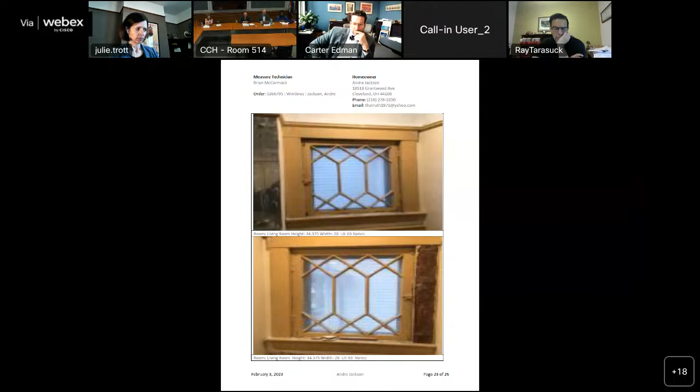So although the current proposal removes the front of the house from the scope, staff would also like to call attention to the decorative casement windows in the living room and the leaded glass sash that appears to be in the dining room. While these windows are on the side of the house, they're significant and losing them would be unfortunate. So the commission typically allows for vinyl replacements on the sides and rear of a home, but in this case, staff feels that the decorative windows on the side of the house are worthy of preserving.

So essentially, we'd be supportive of replacing the simple 1/1 windows as long as the configuration matches the existing, but we'd like to see the preservation of the leaded glass and decorative sash on the sides, which I believe is the image there now. I don't know, it's difficult to tell what room that is, if that's the front of the house or the side. It sounds like that's the dining room, which faces the side.

Yeah, I do have a question, if I could ask. How do we preserve the leaded glass by replacing the window? You can't preserve it and put a new window there. That's correct. I guess staff's position is that the customer needs to just keep the leaded glass old window because it has leaded glass in it and not get a new window, is what I'm hearing. That's the staff recommendation, that anywhere there's decorative sash or leaded glass, those windows not be replaced, but preserved in place.

Okay, thank you for that recommendation. We're going to move on to commission members' questions and comments. Who'd like to start us off?

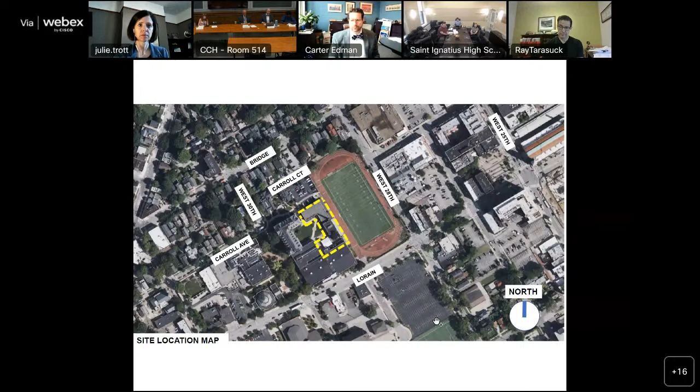Just to reorient everybody to the existing campus, I'll work clockwise from Carroll Gym. So we are proposing removing and demolishing Carroll Gym and the power plant. As we keep going around the clock, Murphy Gym and Sullivan Gym will not be touched.

Library will be fully... excuse me.

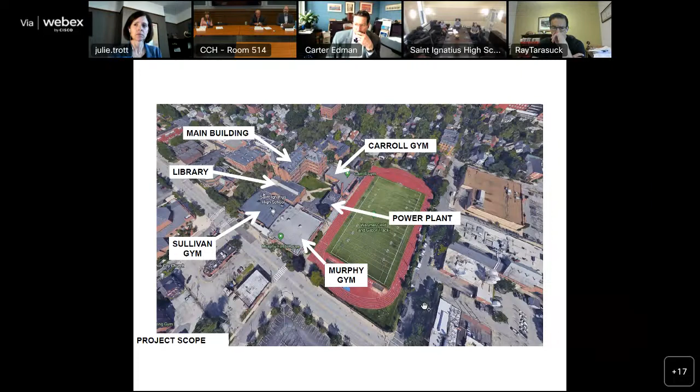Okay, again, Carroll Gym proposed to be demolished, power plant proposed to be demolished. Murphy and Sullivan Gym will remain as is. The library building will be heavily renovated, and the addition will be connecting to the library and to the main building, with some minimal renovations within the main building.

Again, the two buildings being demolished, their footprints. The addition is being placed where those former buildings, the future to be demolished buildings, are, and you can see how it connects to the library.

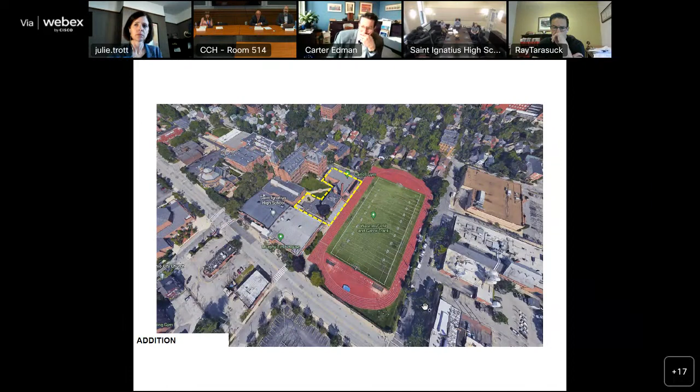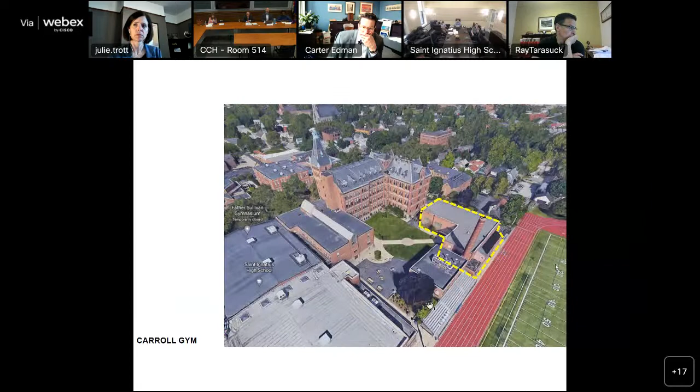Just some closer up images. This is Carroll Gym, I believe built in the 1920s.

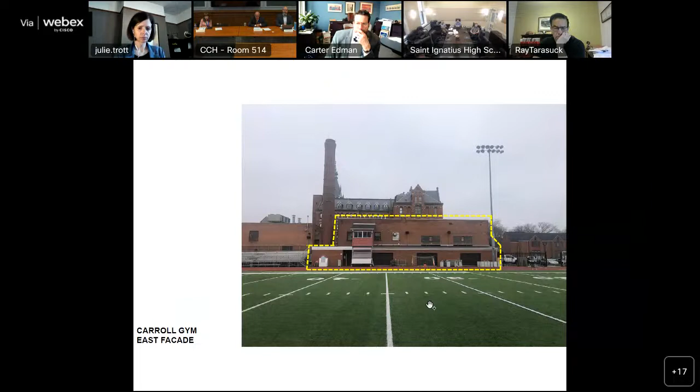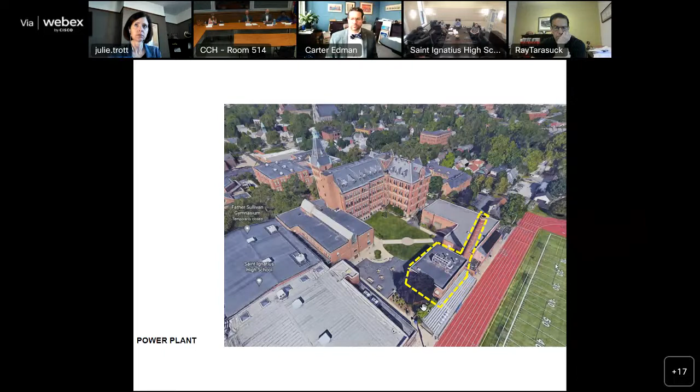Again, the second building to be demolished is a power plant building and the smokestack. This was built in the 1940s.

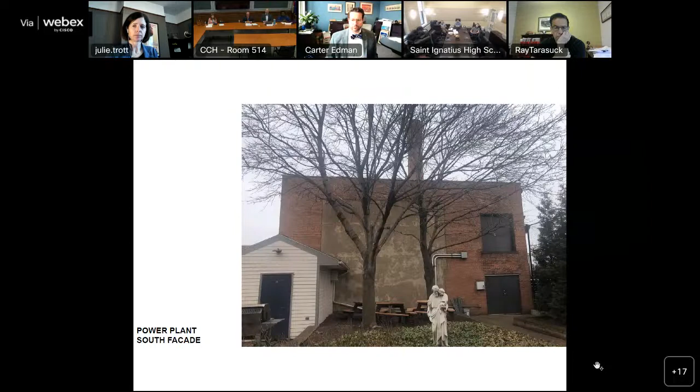Then the venerable 1890s main building. Again, we're touching it and lightly renovating it for some infrastructural things.

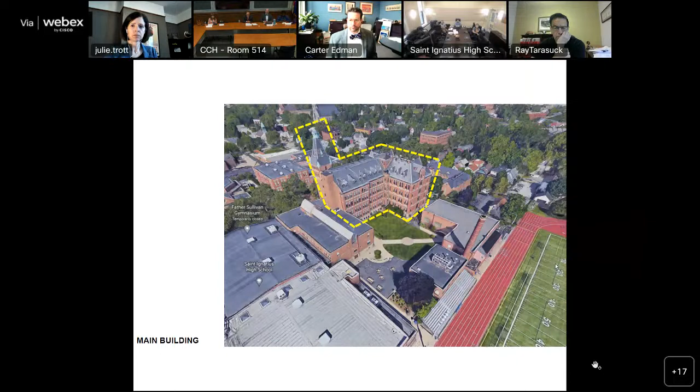And then you can see the interior facades, so the east facades of the main building.

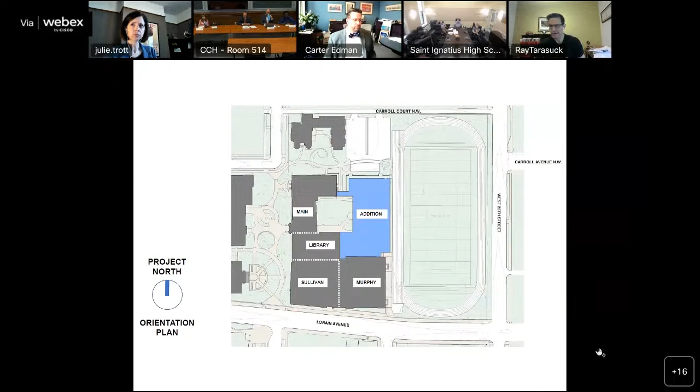So the blue box shows the approximate footprint of the addition. It's always a little bit shifting, but that's in essence the size of the addition.

Part of the scope is to provide a pleasant outdoor campus space between the addition and the main building, so it'll be a combination of hardscape and softscape.

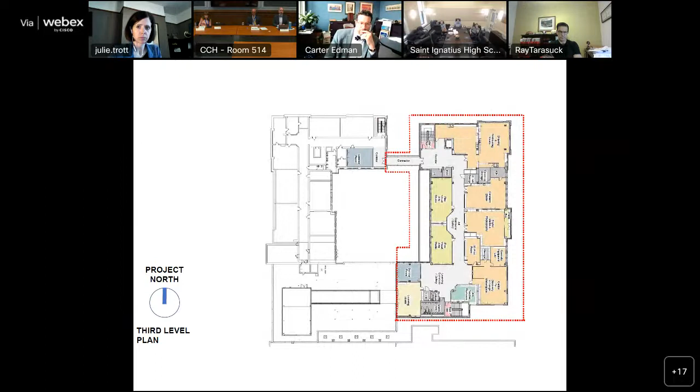The third floor is primarily dedicated to the arts, the fine arts. So we have a series of art studios and making spaces in the orange tone, and then some other flexible classrooms.

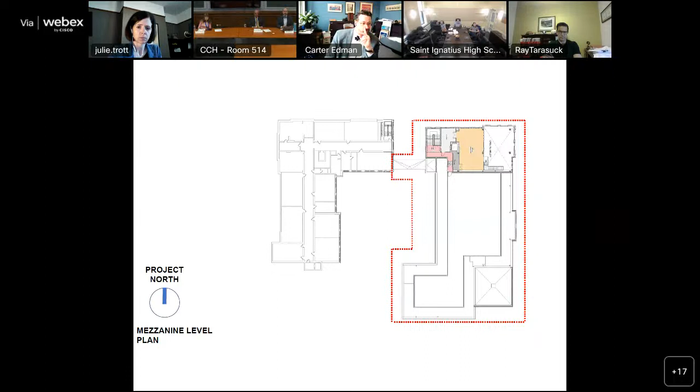Then we have an arts mezzanine to the north side. This is designed for advanced art students, kind of their own studio space that overlooks the main studio space.

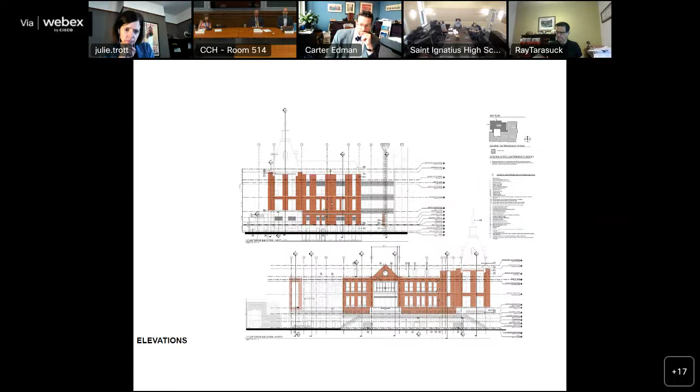I threw the elevations in there to get a sense of the massing. I think the renderings tell a better story.

The changes you saw from last time: the building became more red brick. In discussion with the school and taking in other discussions with the OCI group, we decided to make it more red brick. Across the facade we chose buff material, some cast stone products, at the bases of the AMDG mass, the gabled mass, and the tower mass. The tower has become a much prouder structure than before; previously it was a little stunted, so we let it be more vertical oriented this time.

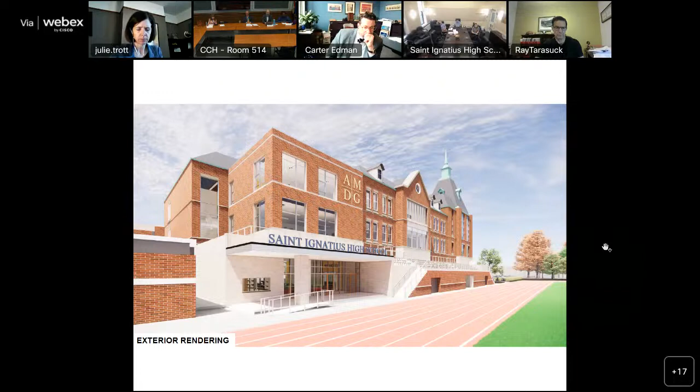This is the view from across Wasmer Field, looking west. You can see more of a red brick composition with the grounding of the building in buff material, which references the buff base of the main building.

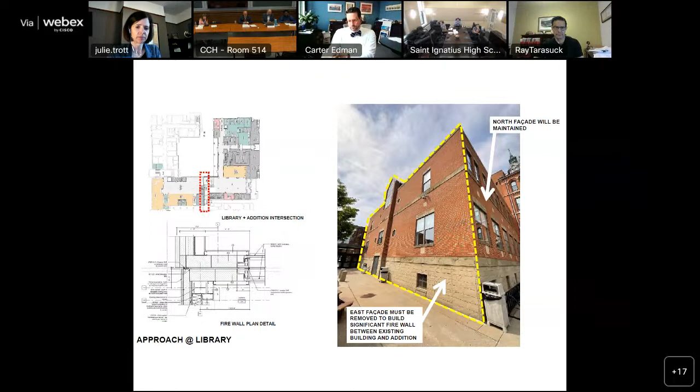We were asked to further discuss how we're attaching to the buildings. For the library, everything within the yellow dashed lines needs to be removed. From a code perspective, we had to make the addition a separate building due to area requirements, so we're building two-hour firewalls at this location to make the addition code compliant. The east facade will be torn off, and the north facade will be maintained.

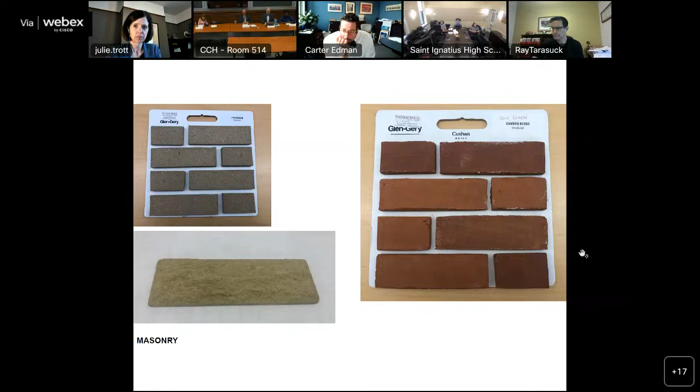Materials are selected to emulate and reference the main building - so I have red brick and buff material.

Miscellaneous metals, downspouts, and gutters will be brown or bronze type. That'll also be the color for the windows, storefronts, and curtain walls.

The accoutrements around the tower will be a green metal to mimic patinaed copper. We wish we could afford copper, but that's not in the cards at this moment.

For the mansard roofs, it'll be a dimensional shingle. Also, one thing I forgot to mention on the tower - we do intend to do a polychromatic banding around the tower element in reference to the main tower at St. Ignatius.

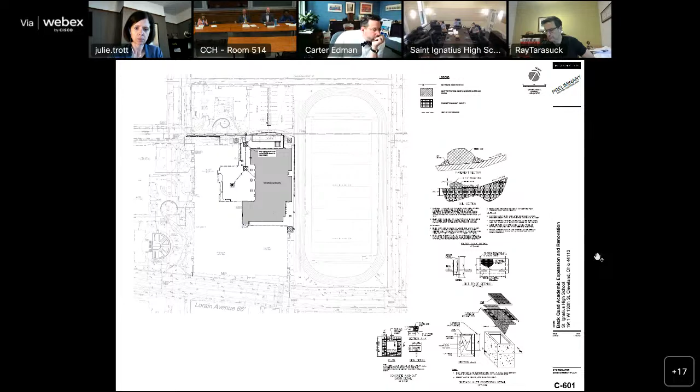This is the area of disturbance diagram, showing what is disturbed and what will be reset during the project. And that's it.

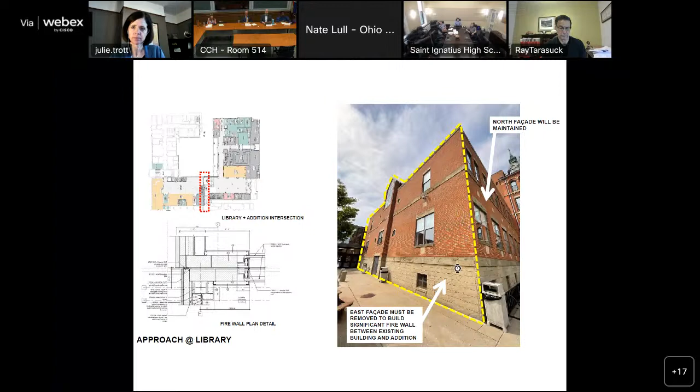Mr. Edman: Thank you Madam Chair. I like the changes, and I think the tripartite massing of those three major elements is really working well. I would echo the design review comments of at least studying the cast stone on that front at the base - not sure which is better, but worth studying - and also extending the lintels beyond the width of the windows, which would help that idea that it's a lintel, but also the overall texture of the facade. So those are both worth studying.

I had a question on the bridge. I understand the bridge is basically all glass, right? It's spandrel and then vision glass, is that correct? Correct. And what color is the spandrel glass? We have not selected that yet. Personally, I like spandrel glass that tries not to look like spandrel glass, but we can do that. We have not selected a color yet.

Okay, I think that's definitely an area of study. I think doing the bridge in glass is the right move here - the contrast is clear, this is a modern piece attaching to the historic building. I think you should consider not having the brick piers as the columns supporting the bridge, but something more in keeping with the architectural language of the bridge itself - maybe round steel columns, something like that. Again, it's part of that new piece that's inserted, so it should be of that language. My other question is, is the bridge cantilevered to the existing building, or structurally attached? The piers are carrying the load and it cantilevers over to the main facade, so we're not resting the bridge on the main building. So it's really just an expansion joint between the two. Correct, okay.

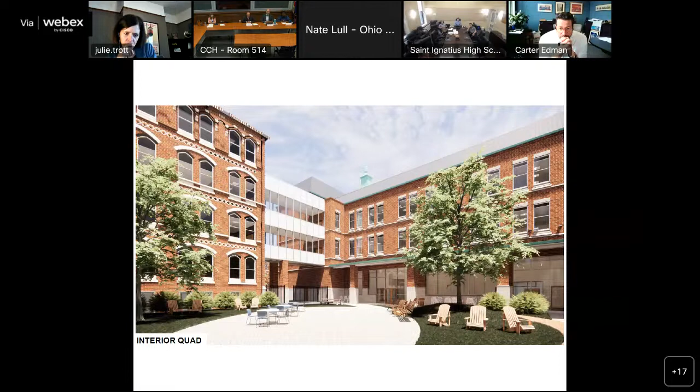Yeah, other than that, I think this is quite nice, but I certainly would ask you to consider something more modern looking for the columns supporting the bridge. If I could just respond - we did it in masonry because we were concerned, although it's shown right now as a beautiful July day with chairs, there will be vehicles that have to get in and out of here, or just wear and tear. So we were concerned that a steel or metal enclosure would get beat up more, that's why we leaned towards masonry. We'll consider it though. Yeah, or maybe a very clean concrete pier. Correct, okay, but yeah, thank you.

Thank you, Mr. Edman. Other questions and comments from the commission? I will insert mine now.

I support and appreciate the applicants listening to our feedback on some of the architectural elements previously, especially the tower. I like the new configuration - it shows reference to the obviously iconic tower, but is different enough that it's not trying to compete with it. I like the adjustments in the brick material, but also think it's worth studying the brick versus the cast stone base for the building, just to see how the massing will feel with that revision. Overall, the comment on the lintels I think is also a good one, so that since there is so much texture and depth to the existing buildings across the entire campus, we want to make sure this one has as much detail and depth as everything else. So, but I'm overall in support of the project.

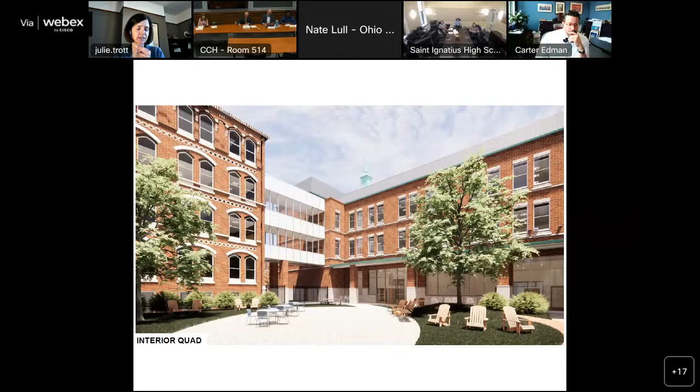Mr. Musson, please call roll. Ms. Anderson? Yes. Mr. Dryer? Yes. Mr. Edman? Yes. Councilmember Gray? Yes. Mr. Strickland? Yes. Mr. Tarasuck? Yes. Ms. Trott? Yes. Madam Chair, the motion to approve the demolition passes unanimously.

Thank you. We'll now move on to the new construction. Any further discussion on the new construction, or would someone like to make a motion?

Mr. Edman: I would move that the project be approved as presented with the considerations that the proposer investigate potential for cast stone at the base, expanding the size of the lintels, and potential other materials for the columns supporting the bridge. Okay, thank you.

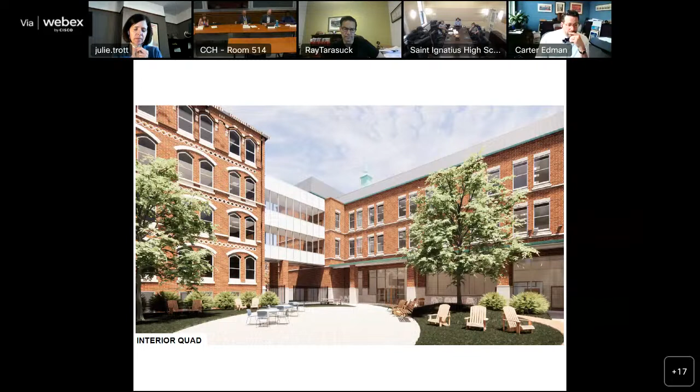Motion with conditions. Do we have a second? Mr. Tarasuck: I'll second the motion. Any further discussion?

Mr. Musson, please call roll and announce the results. Ms. Anderson? Yes. Mr. Dryer? Yes. Mr. Edman? Yes. Councilmember Gray? Yes. Mr. Strickland? Yes. Mr. Tarasuck? Yes. Ms. Trott? Yes. Madam Chair, the motion passes unanimously.

Excellent, I look forward to seeing your project move forward. What's the timing of the new construction? If all goes well, renovations will probably start in January of '24. With the addition, you'll start seeing steel going up probably summer of '24, with anticipated completion for fall semester '25.

Excellent. Well, good luck. Thank you. Thank you all. Thank you.

Mr. Edman, before I move on to the next applicant, I see your hand still up. Was that just a thank you? Just want to make sure I wasn't overlooking something.

Then we'll move on to our next applicant, 50 West, located at West 50th Street and Lorain Avenue, renovation and new construction.

Good morning everyone, this is Chad Curtis with My Place Group. Happy to present our 50 West project. It's located between 50th and 52nd on Lorain. It encumbers the front on Lorain on that block and then wraps around on the sides.

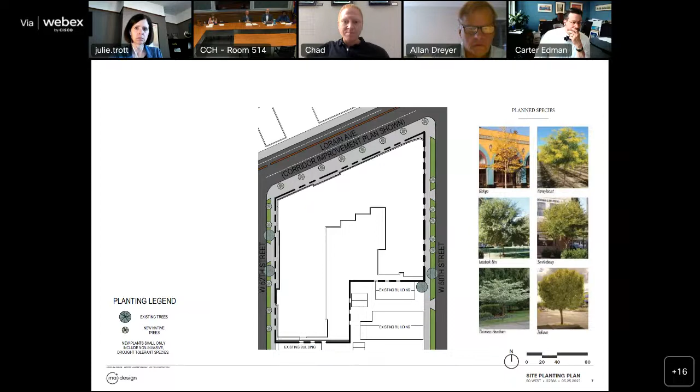Overall, there are about 62 parking spaces and 44 bike spaces on the ground floor.

Listening to feedback, we originally planned the exit of the garage to be off West 50th. We flipped that over to West 52nd.

One of the other things you'll see in the next slide is that the setback we've made at the garage entrance is pretty significant, so there shouldn't be any pedestrian interactions right away as soon as a car pulls out. They'll have plenty of time. We've widened the opening so that you have plenty of angles to see people pulling in and out and pedestrians walking by.

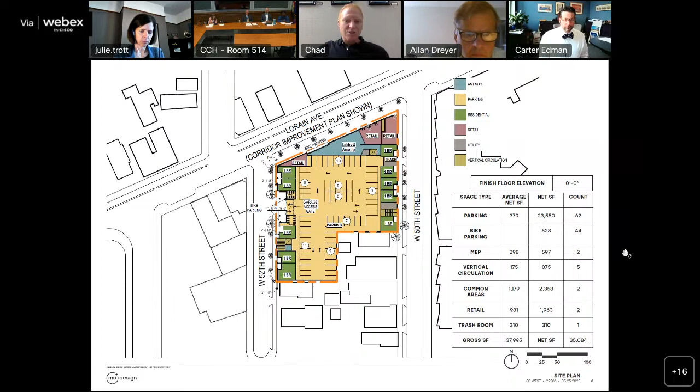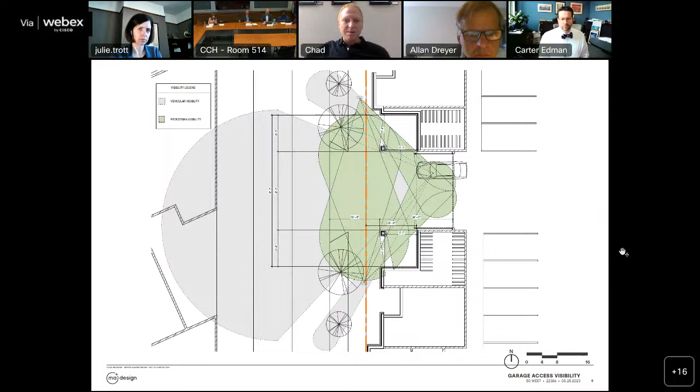It's a dead-end street, but there's still some other people on it. This is a good perspective of what I'm describing. We've got bike storage on both sides of the garage entrance, for easy access for people to come in and out with their bikes, going along with the Lorain bike corridor they're looking to put in when we merge that.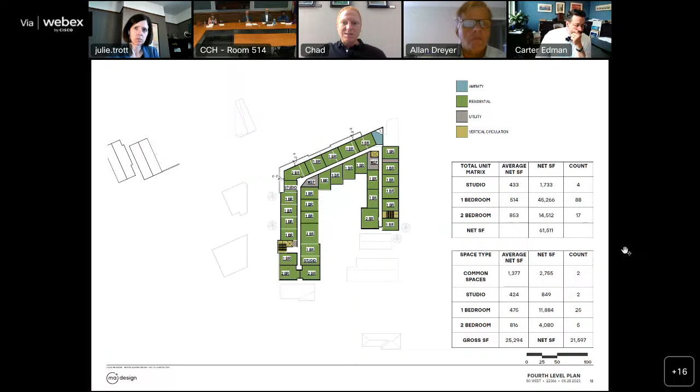On the existing buildings on the corner, our plan is to restore the storefronts that were there, doing our best to bring them to what we think they were prior, while generally keeping a similar facade along all the new storefronts and the old ones going down the lane, so it feels connected and contiguous - adding new flair without disrupting the rhythm too much.

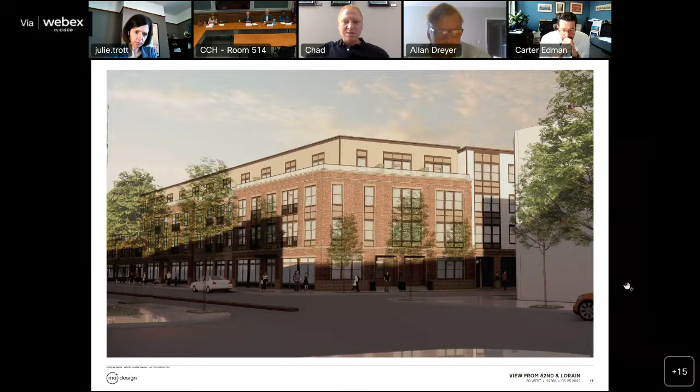Go to the next one. This is the view from 52nd.

Let's zoom in on this. I'm going to let the architects go in detail and answer any questions, then I'll jump in as needed on the different materials.

Hi, this is Yevgeniy with MA Design, the architects on the project. For the most part, for the existing portion of the building, we are going to try to maintain the materials that are there regarding the brick and lintels and everything. For the storefront, we're looking at Kawneer with a black finish, and for the windows, we're looking to have aluminum-clad wood windows for the renovation portion along the front there.

For the rest of the building, the color changes to a more tan color, and for the most part, for the lower portion of the building, we have two types of brick that we're using. For the upper portion, we are leaning towards fiber cement lap siding around most of the upper portions of the building.

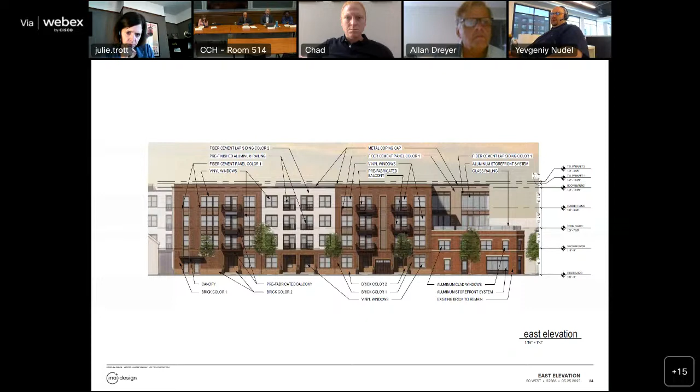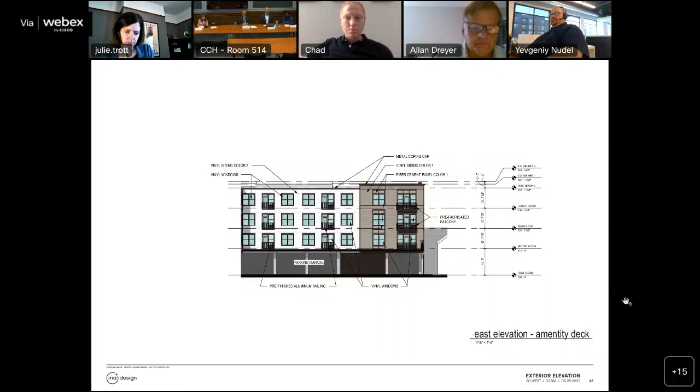Just a few enlarged images here to show more detail of some elements. Here you see some of the inner courtyard. Once again, the material will not be the white siding, but instead more of the Monterey Taupe or tan siding. If you go to the next one, there should be another amenity section or elevation.

Sorry, next slide. So here you can see where the transition is from the area that projects backwards to where we have our actual enclosed area. But once again, though the material will transition, it will not be the white siding—instead it will be the tan siding there.

Going through, showing some of the enlarged views of the existing building here. Once again, just to note, the way the glass railing over the amenity area on the existing building is rendered is not the way the final image—the glass railing, I mean—will actually look.

That's just for rendering purposes to make it more visible, so you know what we're dealing with. The actual appearance of the glass is better represented by an image later in the presentation, showing what the glass actually looks like when it's installed.

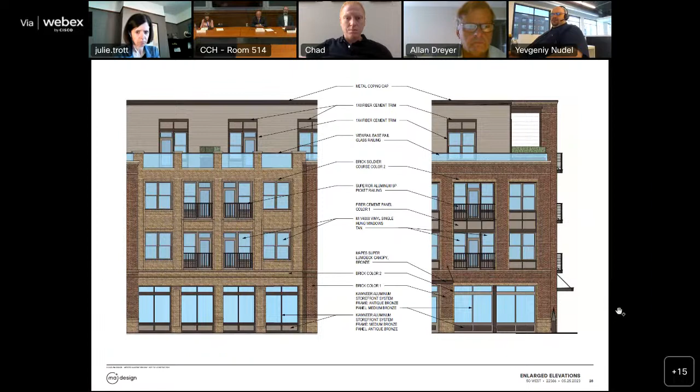Going on to the next slide, just going through, calling out some of the different types of materials and finishes. Not going to get too into the weeds on these.

Some of the details on what's happening in different areas, sort of how we're handling the trash room entrance, some of the storefronts. If you'll notice, the storefront's a little bit different between the existing building portion and the new additions.

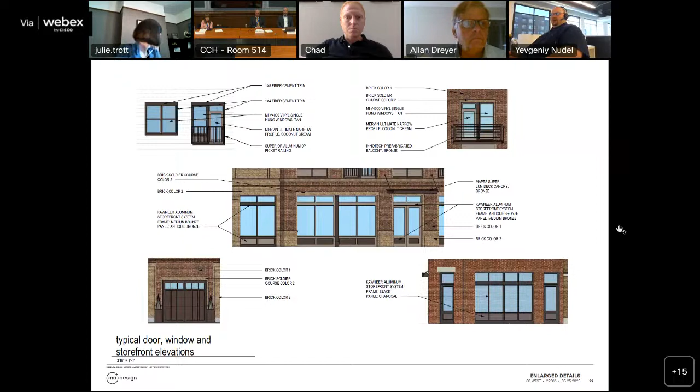Next slide, just going through, calling out some of the materials. The image here does show a little bit more clearly what the glass would look like at the railing, but there's also an actual product sheet that'll show what it looks like when it's actually installed, with an actual image. This is a view from 52nd and Lorain, just showing a little bit more detail of what you would see from that side.

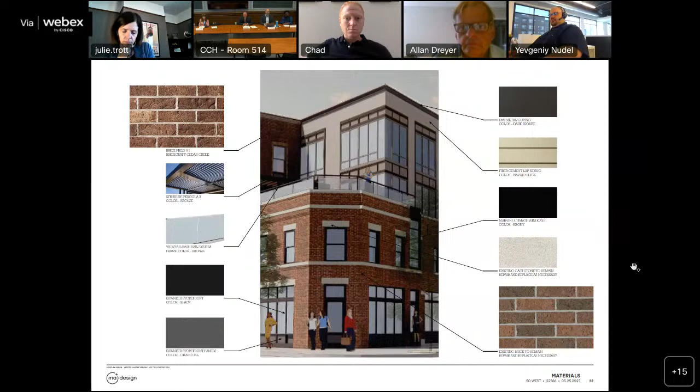From the street, it should be less visible than it would be if it was pulled forward. I will note the actual difference in height between the parapet and the floor level might be more significant than we have shown, so you might actually see less of that glass railing than what is indicated.

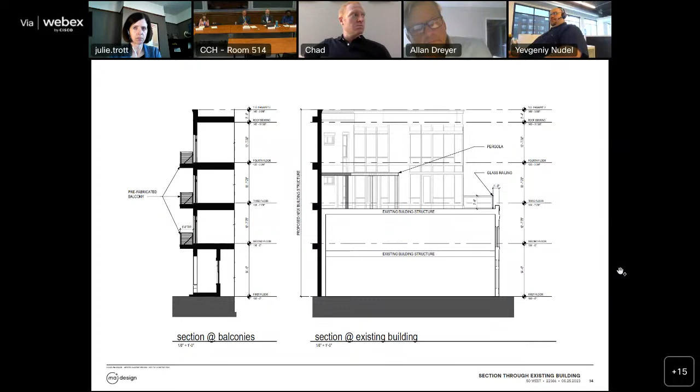Moving on, some of our materials for the pergola, the screen for the garage, the entrance gates that we are proposing, and moving on.

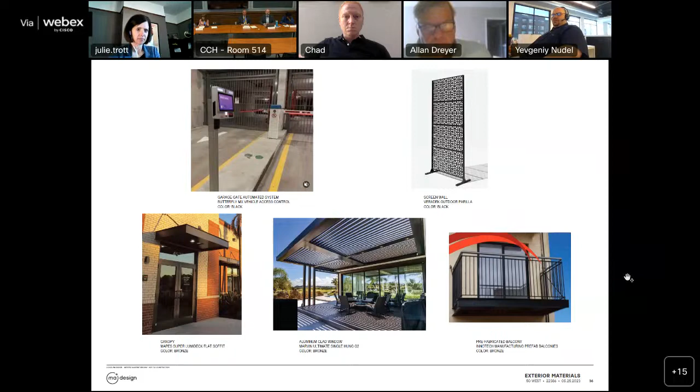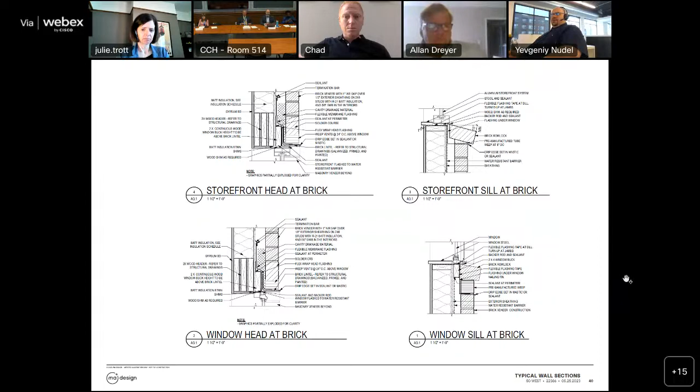The next few images are just some details showing how some of the connections and interactions work, where the materials transition. I will not go into each individual one unless you'd like me to, but we can just sort of glance through these. If there's any questions, feel free to ask, but that gets into the details.

The rest of the presentation, for the most part, is just going through specifications and cut sheets for the various materials that we are proposing for the project.

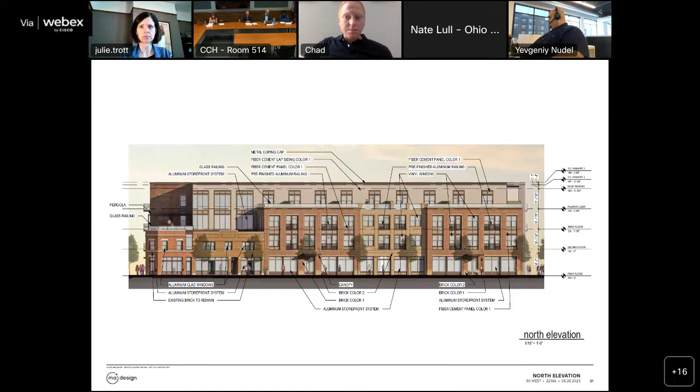All right, and Carl, you made a comment about the chamfer on that corner element. What is the concern there at a staff level? It kind of feels like it competes, and you can see it, it's noticeable here. We had brought that up before — can you make the new section match it a little bit better and tie into it? If not, that was still one of our considerations.

Yeah, I personally don't have a problem with how they've integrated the new construction overall with the existing structures they're rehabbing. I think it's a wonderful project, incredibly exciting to see this level of development proceeding west on Lorain Avenue. I think it's going to really activate that section of Lorain and be a wonderful addition to the neighborhood. So I'm highly supportive of the project as presented.

Appreciate that. Thank you, Mr. Strickland. Mr. Edman? Thank you, Madam Chair. I would reiterate those comments, and I agree with Mr. Strickland that the massing here vis-a-vis the existing building is okay.

I appreciate the applicant really taking to heart and responding to a lot of the comments. I think one of the other comments you responded to that you may not have mentioned was changing the color of the recessed higher area. I think this is a big improvement. I'm also glad you said the white area is not going to be white — it's going to be the taupe color, because I think white just doesn't work with the other things you're doing here.

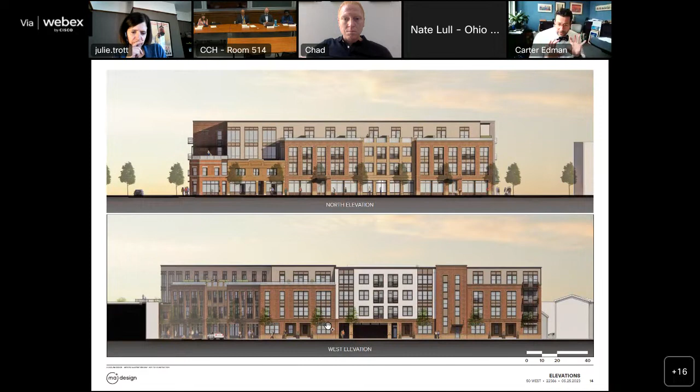I think if it's feasible to do the bay windows on the Lorain facade as staff suggested, that would really be a nice finishing touch on the composition of this north elevation. It would also be a nice amenity in the apartments. So I'd strongly suggest you consider that. On the interior elevations, I understand vinyl is maybe acceptable there since it's not really a visible facade, but I'd try to discourage it from a durability and building performance standpoint.

And so those are my comments. I do have one question regarding the garage. Is the garage naturally ventilated or mechanically ventilated? It's an open air garage. Okay, so there's no mechanical exhaust coming out of that somewhere.

Okay, thank you. Those are my comments, and I agree with Mr. Strickland too. This is a really nice development to see. So thank you. Thank you, Mr. Edman. Not seeing any other comments.

I will state mine. I echo what's been- oh, I got my hand up. Yeah, Ms. Anderson is. All right, it's really hard to see on the screen when it comes up. Go ahead, Ms. Anderson. I can hold mine.

Go ahead. Thank you. I really appreciate that the applicant is maintaining those two buildings on the corner. I'm really happy to see he's incorporating more brick on the front facade, and that those white panels are going to be changed to taupe. I do agree with staff and some of the other commission members that bay windows would really enhance the facade of the building. Again, if we go for programming, I think people would like the increased light in their units.

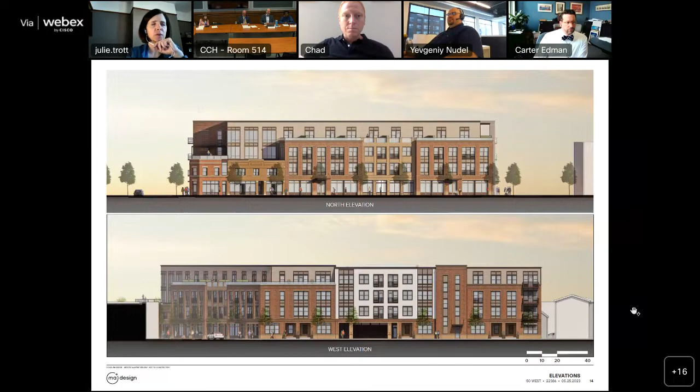Mr. Dreyer: Just to clarify, we only need a motion on the one building, not on both? Correct. Okay, so I will make the motion for demolition of the little white building, I guess it is.

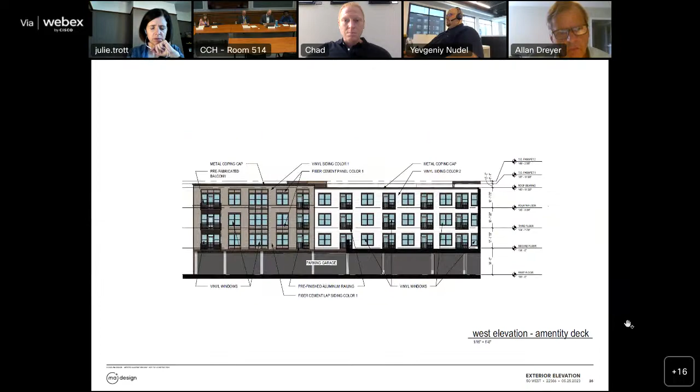Do we have a second? Second. Is that you, Mr. Edman? Yes, thank you. So we have a motion, we have a second by Mr. Edman. Do we have further discussion?

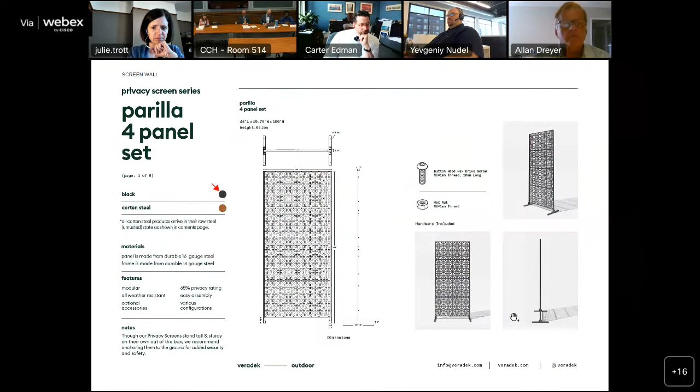All right, Mr. Musson, please call roll. Ms. Anderson, yes. Mr. Dreyer, yes. Mr. Edman, yes. Councilmember Gray, yes. Mr. Strickland, yes. Mr. Trasick, yes. And Ms. Trott, yes. Madam Chair, the motion for demolition passes unanimously.

Excellent, thank you. We'll move on to approval for the new construction. Any further discussion, or would someone like to make a motion?

I'll move to approve the project as presented with a stipulation that composite windows be used in the existing structure to be renovated, and that the applicant consider the use of bay windows as a substitute for the Juliet balconies along Lorraine, and that any signage program and exterior lighting be presented to staff, with staff making a determination whether it has to come back to the commission or not.

So we have a motion, and one clarification: was the window related to the existing building, or is that related to the new construction, or both? Was there a discussion about the window material for the new construction? You had recommended aluminum clad for the existing, and that they upgrade the vinyl proposed on the primary facades.

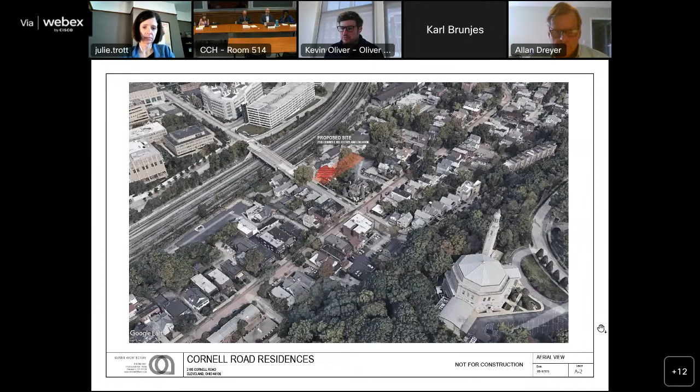This slide shows the 2 existing residences, and there are no current trees on the site. The rest of the site is paved. The proposed demolition is for the 2 residences and the utility garage towards the rear of the site.

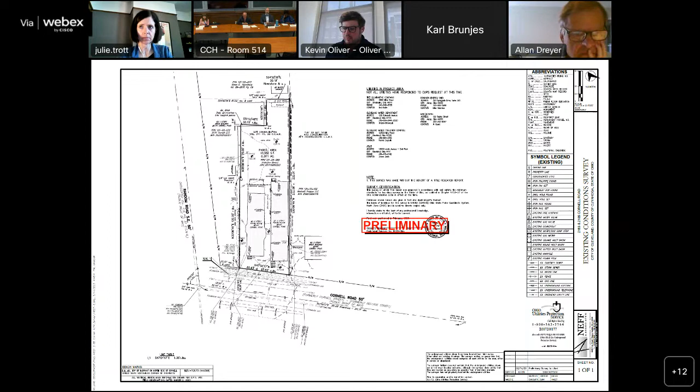When we do that demolition process, we're proposing to salvage a few items: the 2183 front door, 2 interior doors original to the homes, and any original door casings still in the homes, though they've all been modified over time, as seen in photos from the site visit. We'd also salvage sandstone steps, foundation blocks, and basement joists that are in condition to be salvaged.

Our proposed new building is 3 stories, 14 units, located on the western side of the site so that our driveway is parallel to Baricelli Inn's driveway. Recognizing we're facing Random Road, having our tuck under parking correspond to Baricelli's seemed to make the most sense.

We do have first floor units. Zooming in, we have a front-facing unit with a patio and landscaping at Cornell Road, and the tuck under parking shown here. We have 15 parking spaces for the 14 units, with 1 parking space anticipated for snow piling during winter months. We have interior bike storage and a mailbox located up front adjacent to the building, tucked in with some of the landscaping and the patio.

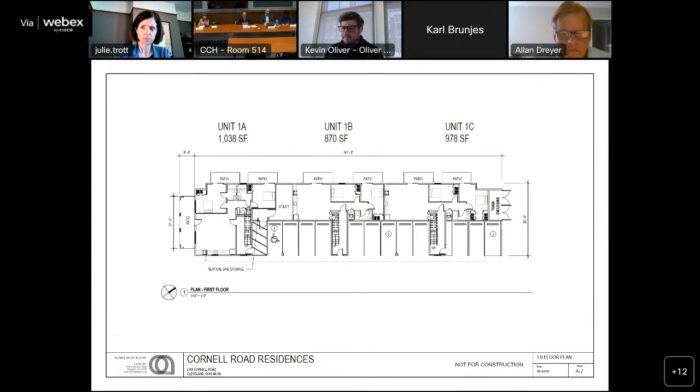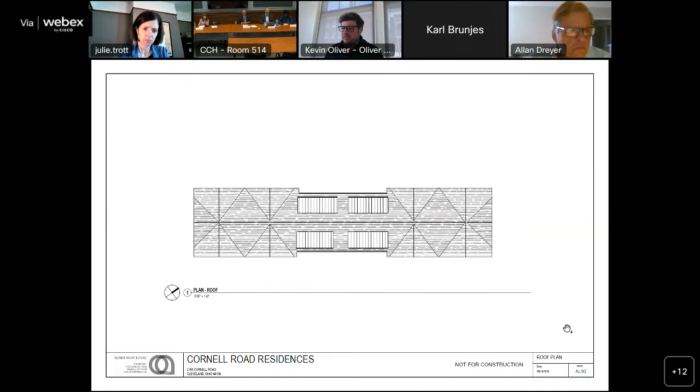Second floor units, and third floor units. Our roof lines incorporate a number of gables and shed roofs. We're proposing standing seam metal roof on the shed components and asphalt shingles on the balance of the roofs.

A mixture of fiber cement siding and brick is proposed for the exterior, with off-white fiber cement siding and a brick masonry base. This is the facade facing the elevation towards Random Road. This elevation shows the areas of tuck under parking that faces the Baricelli apartments.

To the left is the front porch facade facing Cornell Road, a combination of masonry and columns, vertical pickets, balusters on the railings. The image on the right is the rear elevation, showing the 3rd floor balcony area with the utility area down below to the bottom right.

This is the section cut through Cornell showing our relation to Baricelli, with soldier course adjacent to us. We're proposing a McAvoy full range Medex brick, a reddish rusty color. It doesn't match exactly the brick used next door, but keeps in the same reddish brick tones, with fiber cement siding and fiber cement trim.

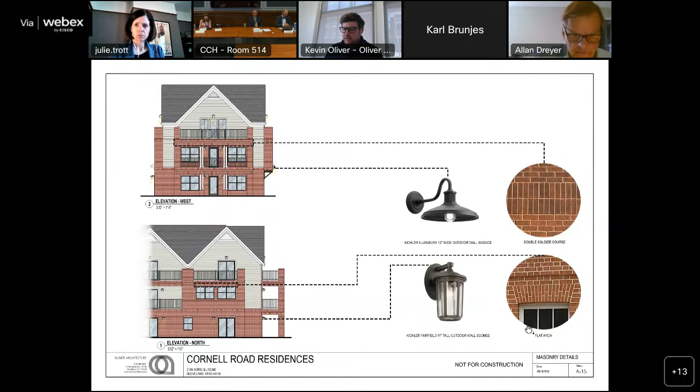Our section cuts: the top one cuts through Cornell Road to the residential homes across the other side, showing the transition from the street to the tree lawn to the sidewalk to our yard, our balconies, and the mass of the building. The lower section shows what that looks like cutting through Random Road, with our building and Baricelli to the right.

This is our certification that there are no existing trees on the site, so we're not removing any trees. Next we'll get into landscape.

So we're proposing to add 3 trees within the tree lawn area, as well as landscaping up in the front and along the side in between the patios on the Random Road facing side of the building. So we actually have a slight net decrease of impervious area on the site versus what's there today.

Our driveway down to the bottom of our site reduces the existing curb cut, which currently is the entire width of the parcel. So the sidewalk will start sooner and it won't be an entire curb cut the full width of the parcel. Next slide, please.

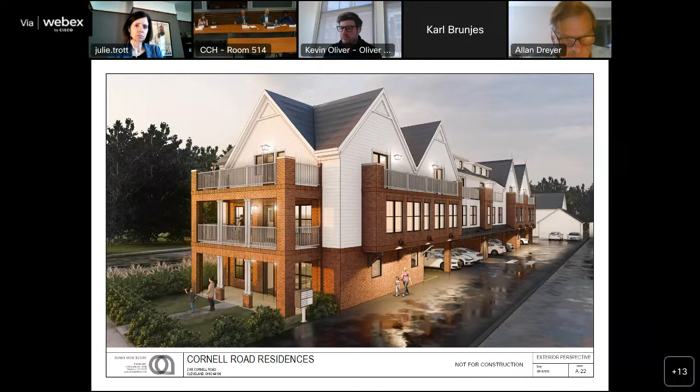This is the rendering if you're coming west on Cornell Road, showing the front porch elements and the tuck under parking. You can see to the right where the driveway changes tone slightly - that's Baricelli's drive, and our driveway to the left. The rendering does make the siding look totally white. It is not totally white, so we would have the off-white siding with white windows, doors, and trim.

And I believe that's it. So I'm happy to answer questions and continue.

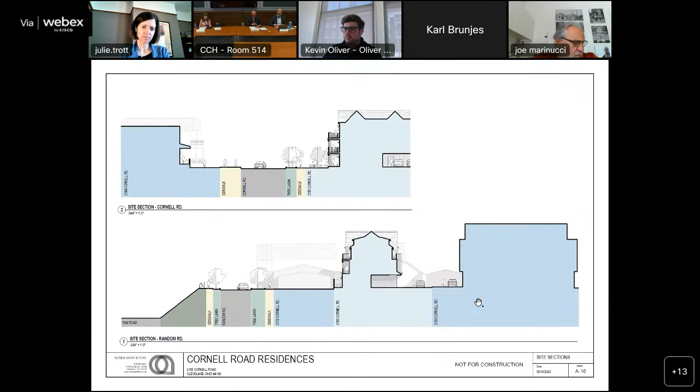Thank you, Madam Chair. It's just as a reminder, this is another one of those projects where we will need two motions, one for the demolition, then one for the approval of the new construction. That being said, staff is never really happy about demolitions and losing buildings that contribute to our historic districts. We'd really like to see at least one of these buildings saved somehow. That being said, we feel this is a creative solution to an interesting site.

Our only real issue with the current design is that we'd recommend removing the gooseneck lighting and replacing those with can lights along the side of the building. Ultimately, staff agrees with the recommendations of the design review committee.

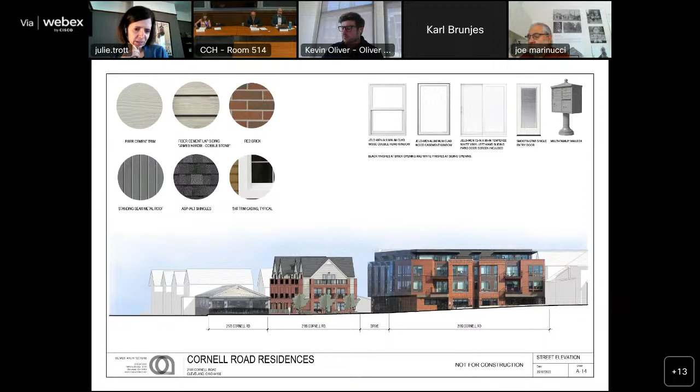I'll begin us today. I do think this is a creative solution for integrating more units on the site and making the massing of the development appear similar to what is currently on the site. My only question is a few details on the Random Road side, which I believe is the north side. Is that correct?

Is there a wood fence on the site? Will that be maintained there? Is there circulation between the concrete areas or outside all of these sliding doors? I'm a little confused on the approach here, since this will be visible.

Sure, so there won't be circulation between them. Each set of doors has its corresponding patio area outside. It's a 5-foot patio, but landscaping would be installed between those so there isn't a circulation path leading from front to back along the length of the building.

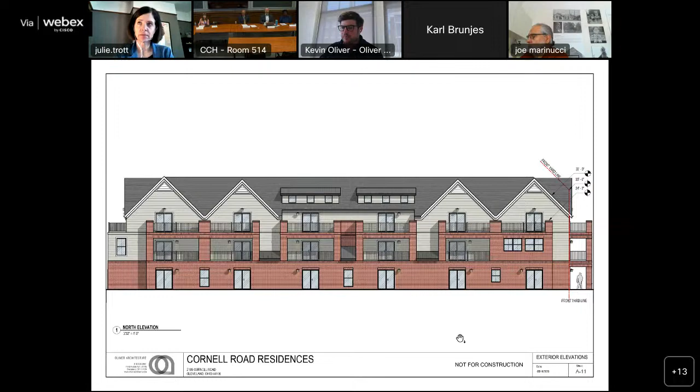I believe the fence is on the adjacent parcel's property currently. And Karl, I think you had some discussions with them about what might happen there, or how our landscaping would come in to screen or not screen from parking.

Sure, so just to verify, the wooden horizontal fencing is on the neighboring property. It's part of the retail restaurant of Wolfpack Chorus, so we don't have control over that fencing. Our discussions with the owner of the restaurant were to keep the fencing, maintain it, help however we can so there is some screening and privacy for our first floor residents.

And as Kevin alluded to, we do have some landscaping in between the patios to offer residents a bit more privacy on their exterior spaces. So it's not intended by any means to be a walkway on the side of the building.

Okay, I would agree with staff that the goosenecks don't really add as much to your design as desired. Simplifying it into a soffit light would probably be as effective and have less spill into the adjacent property. Overall though, I am in support of the project and appreciate your creativity to try to make it work within this site.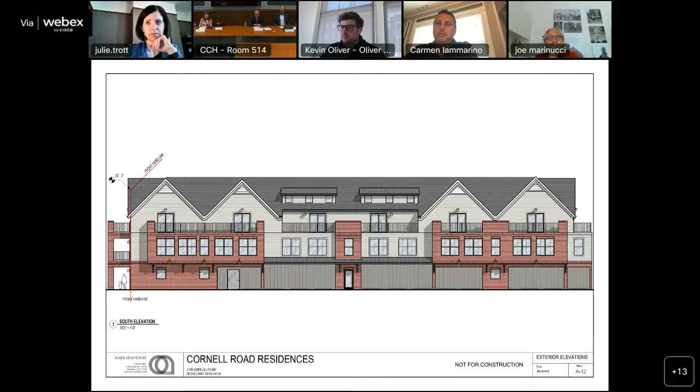This is Bob Strickland. I was on the site visit to this site earlier in the year, and my takeaway is that the renovations that have been done previously to the front of the existing homes completely destroyed the historic character of that primary facade on Cornell. So based on that, I really don't have a problem with the demolition of those two structures.

But I think it's good to have that salvage plan for those elements that were identified, and I would make that a stipulation as part of the demolition approval that those salvage items be maintained.

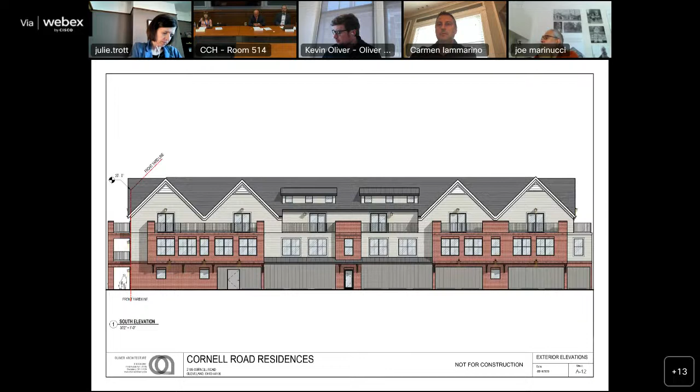As far as the new structure, I think it's appropriate. The only thing I would comment on is the massing, the massiveness, of the front column supporting that porch on Cornell. Even shown in the rendering, they're just so massive. If those could be scaled back, or even an alternate design for that porch facing Cornell, I think that would be an improvement for the project. Thank you.

Ms. Anderson also had her hand up. Go ahead, Ms. Anderson. Thank you, Madam Chair. Normally I'm in alignment with the staff recommendations, but I totally cannot support the demolition of these two contributing structures.

On the site visit, I've been in many structures that were in much worse condition that have been saved, renovated, and turned into beautiful, desirable homes.

I've worked with people in the past in places like Ohio City, who bought houses that were pretty ramshackle, pretty unassuming, not very attractive. They were not able to demolish them because of the historic district and because of the contributing nature of those properties.

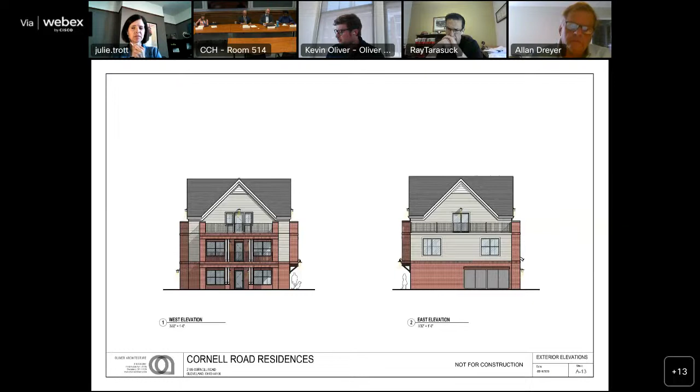I'll move to approve the demolition with the stipulation that the salvage items noted be retained. Do you want to entertain the design review's recommendation that the demolition cannot occur until final financing is in place and approval of the new construction? Yes, with that stipulation as well. We have a motion with conditions. Do we have a second?

We have a motion on the table related to the demolition. Would someone like to second it?

This is Carter, I'll second that. All right, thank you, we have a second by Mr. Edmund. Any further discussion?

None here, none seen. None seen online either. So Mr. Musson, please call roll and announce results.

Ms. Anderson, no. Mr. Dreyer, no. Mr. Edmund, yes. Councilmember Gray, I'm abstaining again. Mr. Strickland, yes. Mr. Tarasuck, yes. And Ms. Trott, yes. Madam Chair, the motion passes again, 4 to 2 and 1 abstention.

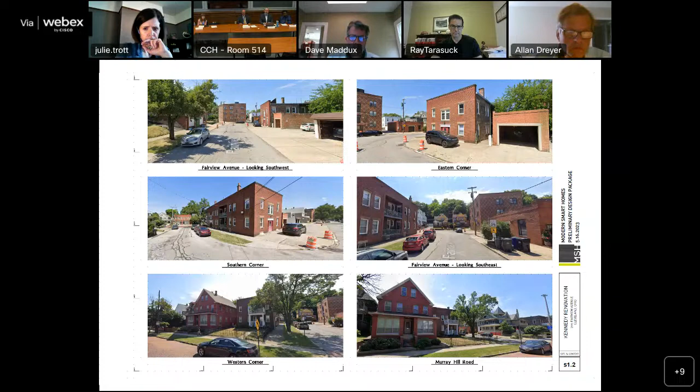We can skip down to the next.

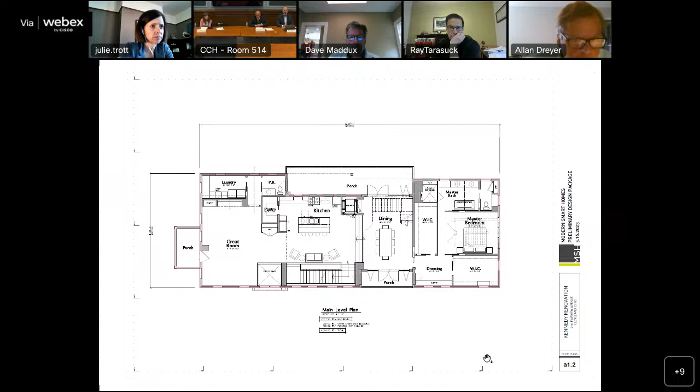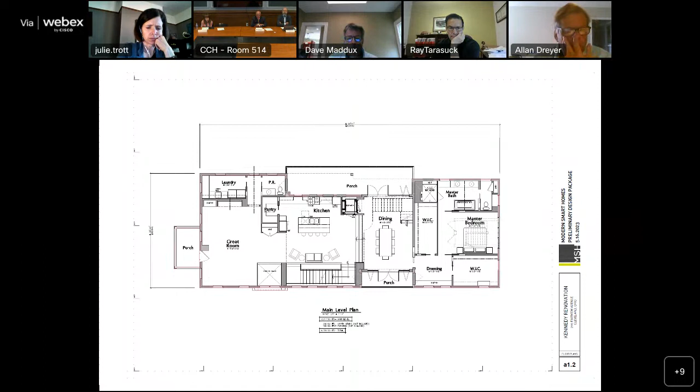The next slide indicates the main level plan. We'll have a great room facing the Murray Hill side—Murray Hill is on the left of this plan, with Fairview on the bottom and right. There's a main living area and main stair, dining, and the master bedroom on the back side over the garage area. We're also incorporating a penthouse roof access form shown on the next plan.

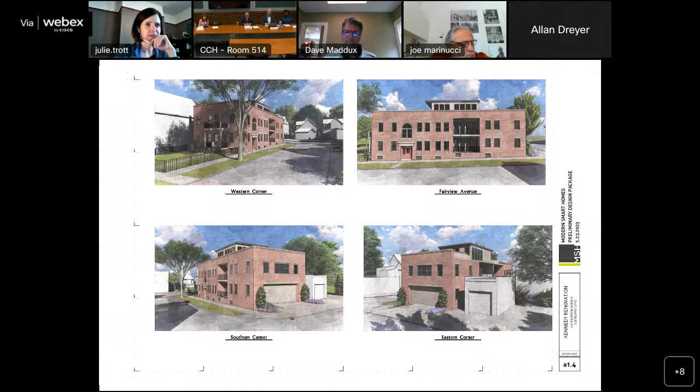Mr. Edmond, thank you, Madam Chair. I think it's always difficult, or always a challenge for architects to not do too much, and I think you've shown very wise restraint in this. I have one question: over the door on Fairview that's going to be the new main entry, there's currently sort of a neoclassical scroll and then a cornice detail above that door. Are you keeping that? In the rendering, it looks like it's sort of 2 blocks.

Yeah, our intent is to maintain what's there. Okay, it's just for the rendering. Okay, yeah, I definitely prefer the lighter scheme. I think it's much more friendly to the street. I also like that you're opening up under that sort of tympanum under the arch, and that's going to be lit up high over the entry, and also the clerestory from the penthouse over the dining room.

I think given all the garage doors and everything that are on Fairview, I don't have a problem with the garage door there. It looks like that's actually currently sort of a rear entrance. I don't know which entrances are used the most, but I think the face of the building, the front of the building, is the Murray Hill facade. You probably just haven't gotten to this yet, but I think you're not doing a lot to that facade, which I think is good.

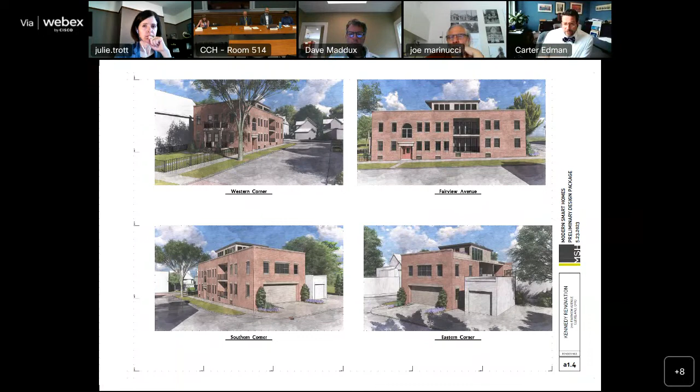I have one other practical question. Looking at the Google Street View right now, it looks like the windows step up as it moves south. Are the floors all level, or do the floors step up but the windowsill heights vary? No, it's interesting that the floor units do step, and we're taking that opportunity to create some interest inside on the main living area by stepping the dining room up from the kitchen area. We're maintaining the window relationships to the floors they currently exist on, so we'll be maintaining the various floor levels that exist.

I think it's interesting that this is going to single family, as was mentioned, while some other single family dwellings are being split up. I don't think it's necessarily material that this is happening, but I think this is interesting. I really dig this project, I'm very jealous of the owner. I think you've shown wise restraint here, and this is a building that you just kind of look past right now, but I think you've made it very handsome. Thank you.

Thank you, Mr. Edman. Other questions and comments from the commission? Ms. Anderson has her hand up.

It's kind of a minor detail. The Fairview elevation, there's an existing front door we're talking about. Is that door there, and are you going to maintain what's there, or is this a change? I see there's side lights and a door, correct? Correct. Because it's an 8-unit building, there are various entrances to the apartments. The actual street address is on the narrow side of the Fairview, where we're introducing the new garage door, so technically the 2110 address is for the door facing that side. But the side you're looking at right now, with the front door and the half round window above it, is a more prominent street front elevation, and that is an existing door that will be our main front door to the building.

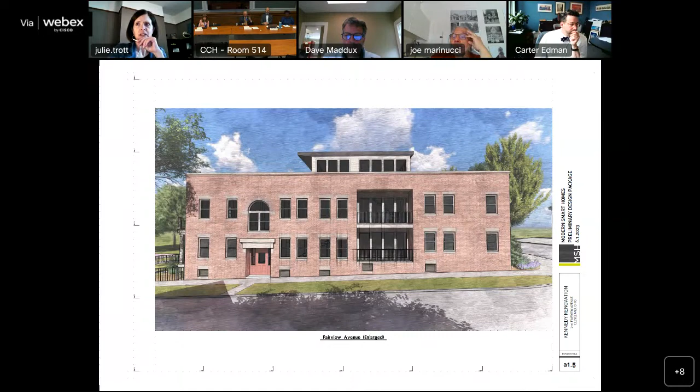Thank you, Ms. Anderson. Other questions or comments? I'll make a comment that I agree, I think it's a very cool house as well, and I like the more buff color, the lighter tones rather than the dark configuration that was first presented. But yeah, I think it's an attractive house.

Now it looks like there's a decorative fence on the west corner. Are there any openings or gates in that fence leading towards that lawn area to that facade? There's a sidewalk, you can kind of see it on that western corner view. We clipped it off in the rendering, but currently there is a gate that leads to that sidewalk that leads to the front. We'll thoroughly explore the landscape potential of that corner, that's just showing kind of what's there now.

All right, yeah, I think it's a great project. Thank you, Mr. Strickland. I guess I echo much of what my fellow commission members have said, I think it's a really interesting project. I do see staff's position about the elimination of housing within this area versus converting it to a single family home, where typically we're having the reverse conversation. I think you've shown a lot of creativity, though, to try to maintain the existing architecture.

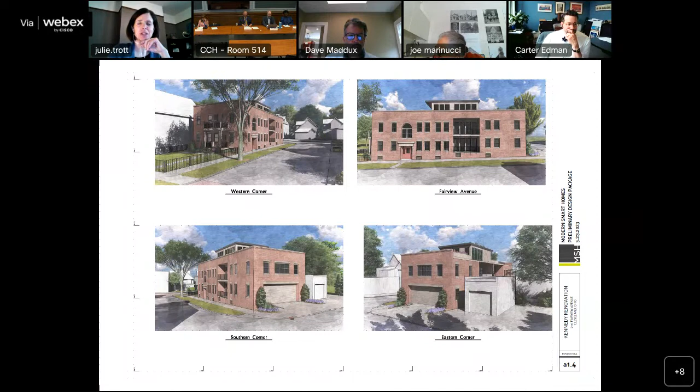Other questions and comments from the commission? Since this was a concept plan only, we will not be taking a vote today. Does the applicant feel like you've received enough feedback from the commission to continue on with your design? I feel that we have. Thank you, we appreciate it. Look forward to seeing your project move forward.

That concludes our concept plan reviews. We'll move on to meeting minute approvals. We have 4 meeting minutes that were forwarded for review. Does anyone have any questions or comments on the meeting minutes, or would someone like to put forward a motion?

I'll move to approve the minutes from February 25th, 2021, December 9th, 2021, July 28th, 2022, and May 11th, 2023. We have a motion, do we have a second? This is Carter, I'll second. Thank you, Mr. Edman, we have a second. Any further discussion?

None here, not seeing any online. All right, Mr. Musson, please call roll. Ms. Anderson? Yes. Mr. Dryer? Mr. Edman? Yes. Councilmember Gray? Yes. Mr. Strickland? Yes. Mr. Trasick? He must have stepped out. And Ms. Trott? Yes. Madam Chair, the motion to approve the minutes passes unanimously.